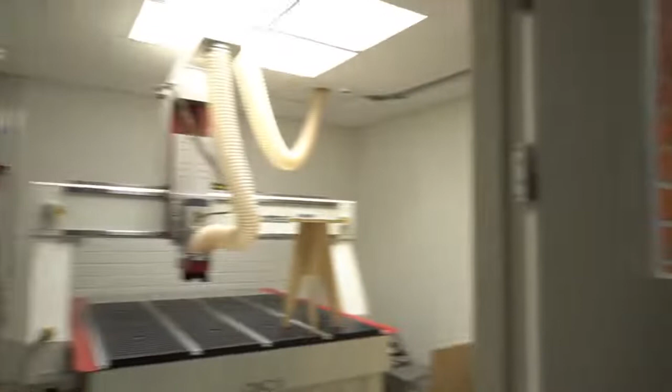It's one of the most dangerous machines here at the Fab Lab, but we have a nice setup, so it's actually locked - a room is built around it in order to provide as less damage as possible. It's also soundproof.

It is basically a milling tool that is mounted on an XYZ axis, so it can rotate the tool around its axis, and then it can move it in 3 different directions, basically X, Y, and Z.

This machine also features a vacuum table. These vents over here are where the air flows, so it's being pulled in through these vents. There's a vacuum pump on the other side of the machine.

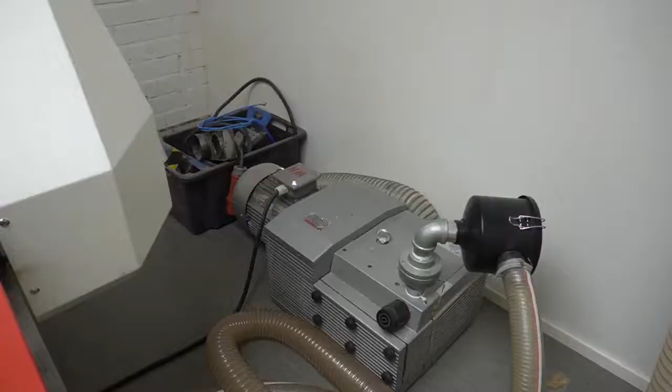For the vacuum activated surfaces, the machine actually has 2 sides, the left one and the right one, and those can be activated separately.

Over here to the left, that's the machine controller, which you use to control the machine. The machine controller is connected to the computer - this is just a screen and keyboard, the computer is actually on the other side, which then connects to the machine controller via a network, with an Ethernet cable.

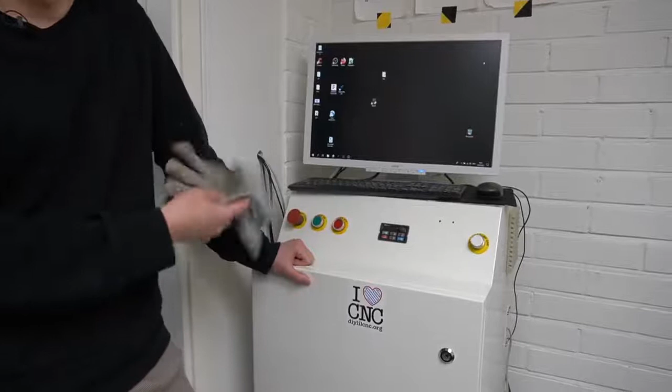On the computer, you load the G-code, and then this G-code, or the machine-specific commands, are sent over to the controller, which then drives all the motors of the machine.

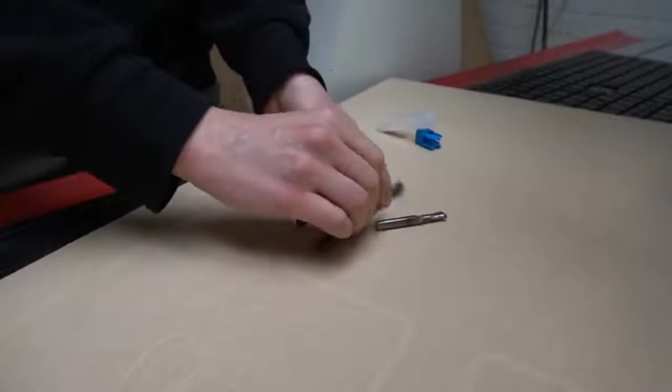So here we see several tools, and you should be able to tell the difference between those. Let's organize them from left to right. This is a drilling tool, a drilling tool for wood.

It can go only vertically, so you cannot use this for milling. If you know what you're doing and you need to drill only holes, then you can use this for drilling holes in wood.

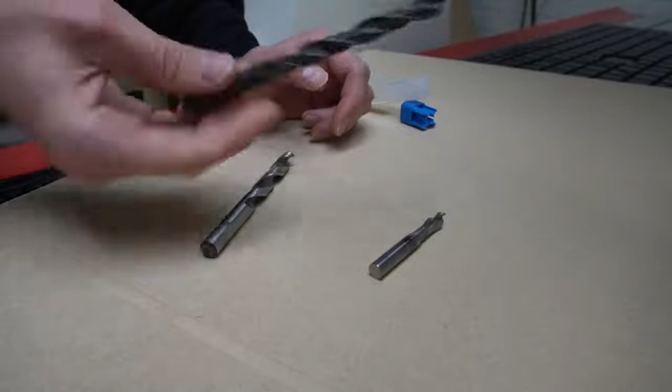This other one, with a pointy tip, is a metal drilling tool. It also can go only vertically, so it is made in a way that it is very good at pulling chips out and drilling holes. We don't drill metal here at the lab, because the chip extraction system is designed only to accept wooden chips.

So then you would use this only to drill vertically. What we are going to use though is milling tools.

This guy is, for example, a 2-flute flat end milling tool, and it is very good at going sideways. Milling tools are designed in a way that when they spin, they are very good at picking up material on the sides.

You can use this to do cuts and also engrave things on the surface of the material, but it's not very good at going downwards. If you're going downwards, it's usually better to do it in a circular motion, because it needs a little bit of space in order to be able to chip into the material. It's not very good at chipping the material vertically.

So forget about these drilling tools, let's focus on the milling tools. The next thing we need to know about is also our material. By the way, always, when handling material, especially wood, always make sure that you wear gloves.

We're going to use this leftover piece of wood, of plywood. This is a pine plywood, relatively soft. It also has a glue that is waterproof, so it's like outdoor plywood. Not a very high quality one, but just enough to get some interesting things done. If you post-process it properly, you can make nice things out of it.

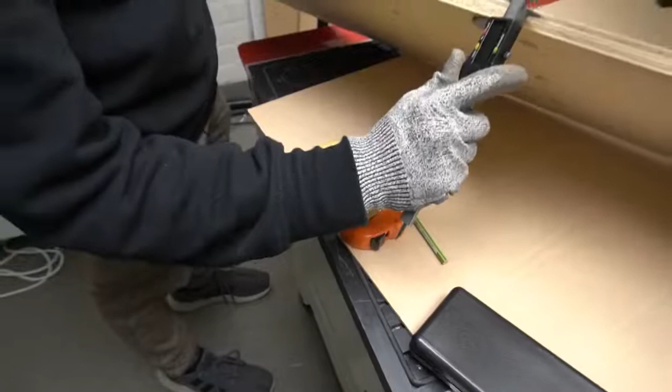So there's another thing about the material. Okay, we measured the X and Y dimensions, but we also need the Z dimension. We need to know the thickness of the material. So let's take a caliper and measure the thickness. Even though this is supposed to be an 18 millimeter plywood, it's showing a different value because it probably was shrinking.

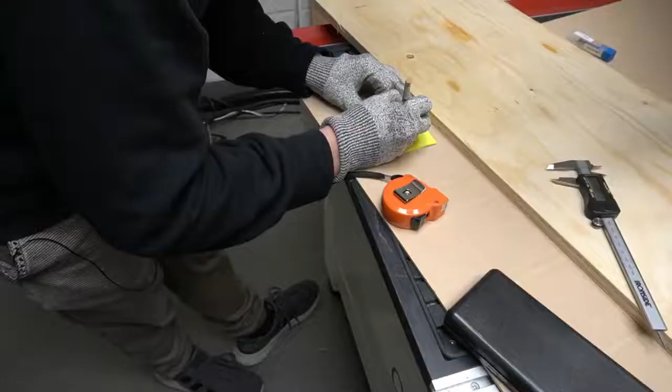All kinds of things happen with soft materials. They shrink, they're compressed, they bend and whatnot. So now we see that it's 17.64 millimeters. So let's write that down like this. So that's for the material. The other thing is that we should know some properties of the tool.

If you are interested in more tools, you can find them here. Here's a drawer with some tools. They are labeled with serial numbers. The first number that you see here tells you the diameter of the cutting part of the tool. And if you follow these numbers and look up on the wall, there's a table which gives you more information about the tool.

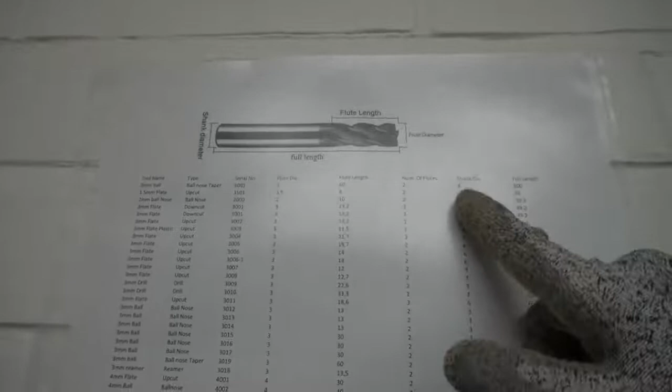For example the flute diameter and the flute length. It's sometimes necessary to set up tool instances in Fusion, for example. Then number of flutes, that's very important. Most of the tools that we have here have 2 flutes. Then shank diameter, that is important for mounting the tool. But let's continue with the tool measurement.

This one came in a box that says 8 millimeter 2 flutes flat. You can of course look up the table, but you could also use the caliper to measure its diameter, just to make sure. Sometimes things are not put in the right boxes. You see it shows 8 millimeter diameter for the cutter and also 8 millimeters for the shank. And then we can also check the flute length. It seems to be 30 millimeters if I'm looking from the right point.

Also, this tool has an interesting geometry. This is a so-called down cut tool. When it's cutting, it's going to press the chips down. So it's very good for cutting thin materials, and for plywood it is nice to use it to cut the top surface.

Usually, if you want the cut to be really nice, you would use this to cut the top surface, and then you would use an upcut tool to cut the rest of it, but maybe that's too much detail. So we're going to use this tool. Now we can write down some parameters for the tool. Basically what we need to know is the diameter and the number of flutes.

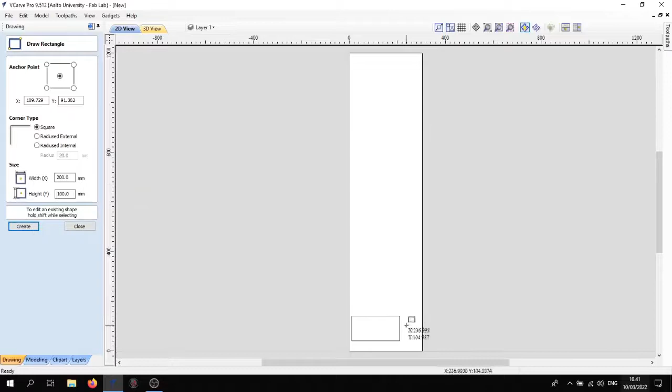But this time, just to test some things, we're just gonna make something really simple, also to explore the available tools over here. So let's start with creating a rectangle. For each tool that you open here, there's an additional menu. So we can specify really precisely where we want that rectangle to be, and specify its width and height. So let's say 200 millimeters and 100 millimeters, or let's make some kind of a shelf structure, something like this. Okay, and when you click create, it's going to create the rectangle.

It's closed. Let's try to position it as we like, somewhere here in the center. And let's create one more. So with the rectangle tool, you can actually also click and draw in order to create the rectangles. But if you want precise measurements, then you can use the rectangle menu over here. So for moving it around, let's select the transform mode, move, scale, rotate selection. Let's try to align it somehow.

And what I'm going to do, I'm going to create some features which are going to allow me to snap them together at an angle. So sort of a finger joint thing. If we do not remember what the size of it is, we can use tools like the measuring tool or this dimension tool. So we can select the point over here and then go over here, and then we can check the distance. So this is 200 millimeters.

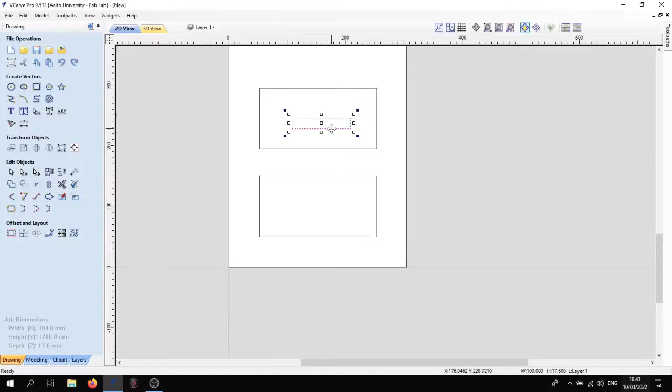And let's create a rectangle that is going to be 100 millimeters wide. And here we need the thickness of the material. So it was 17.6. That is going to work as our connector, or as the finger joint. And we can snap it somewhere. Let's do it like this.

I'm just wondering, is it possible also to align those? Yeah, so we can select this alignment tool. Oh, this is vertically. Oh yeah, so here you can align to material. Okay, there are quite a lot of nice options over here, but now we centered them in the material, and we also centered them between themselves. We could also center this one in the material like this. And we're gonna make a copy of this one. So edit, copy and paste.

And let's move this inside the other object. And let's align those together. So inside edge, we want to align it like this, and then we want to center it within the rectangle and also within the material. We can also double check whether these are aligned properly. Here, first need to select the bigger rectangle, and then, no. Yeah, now it's right. And we can close this.

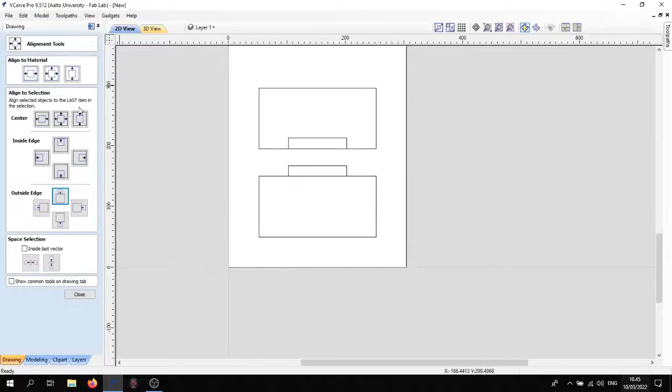And what we want to make sure of is that there are no lines overlapping. Because we will need to cut out the shape of the object, and if the cutter is going to go somewhere in the middle, then we're not going to achieve what we want. And for the other one, we want this part to be cut out from the rectangle. So what are we going to do? We're going to select these two and look up this weld option, weld them together. And then we're going to select those two and select the subtract option. So now, as you see, the idea is clear. I want to snap these together.

Of course, if you're using parametric software like Fusion, FreeCAD or whatever, then you can define all of those as parameters. You can define the thickness of the material as a parameter, and you can also define the tolerances in between as you read them from the process.

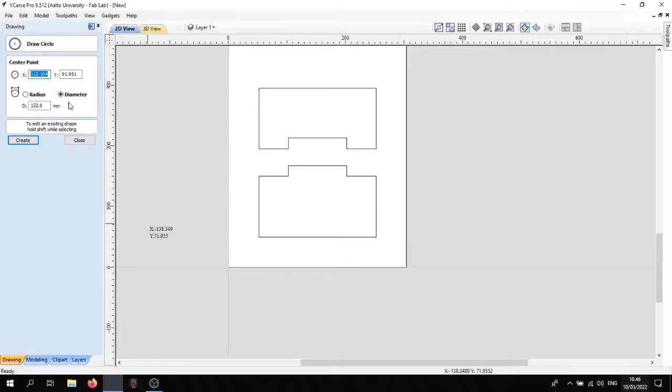Next, I'm gonna create a little circle that's gonna be a pocket for, let's say, a flower pot. Let's make this, and let's go with 70 millimeters. Small flower pot pocket.

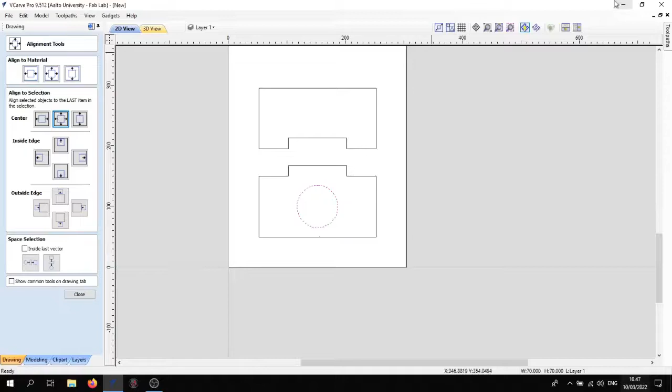And let's use the same alignment method. So we want to align it to selection and maybe move it a little bit down here. Okay, and now from here, we can go back to the main view like this and disable certain mode.

So we need to generate toolpaths so that the machine can understand how to move the tool in order to cut these out. And there are going to be certain things that we're going to bump into. So for example, for this inside cutout, there's going to be a problem that we're going to encounter. The problem is going to be the following.

So this is the tool when we look at it from the top. It has a certain diameter, in our case 8 millimeters. And if we use it to cut along the line, then what is going to happen in this corner is it's going to leave a little bit of material, and this is going to prevent the sharp corner of the other part from actually fitting in there.

So we need to make sure somehow that this corner is shaped in a way so that the tool can actually cut it out with enough room for the other part to enter. And V-Carve is nice for that because it has special tools that we can use to fix it. The main tool that you use for this is the Fillet tool.

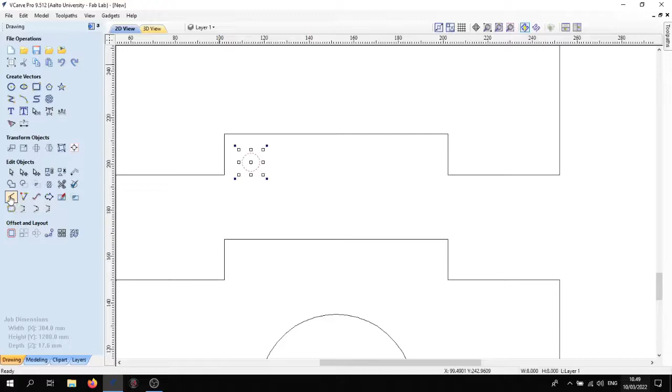And for that, we need to enter the tool radius. We're going to use an 8 millimeter tool, so we could specify the tool radius as 4. But I'm adding 0.1 to the value, because sometimes if the values are very precise, the calculations do not finish nicely. The toolpath generator sometimes skips some areas if there are overlaps. So I'm just telling V-Carve that the tool might be a bit bigger.

We could do a normal fillet if we know that we don't need this extra space for the other part to enter there. You can also cancel it out, or we can use the so-called dog bone fillet, which is going to create the minimum cut necessary to make enough space. So now if I close this and draw a rectangle from here to here, you see that the corner of the rectangle is going to fit right in.

Or you can also choose to have a T-bone fillet. By clicking on the individual edges, on the top and the bottom, you can specify where the T element, where the cut is going to go. Sometimes this can be useful. Some people think it looks better than the dog bone fillet, and the plasma option is more for plasma cutters. So you can choose one of those. I'm going to go with a dog bone fillet in these corners over here.

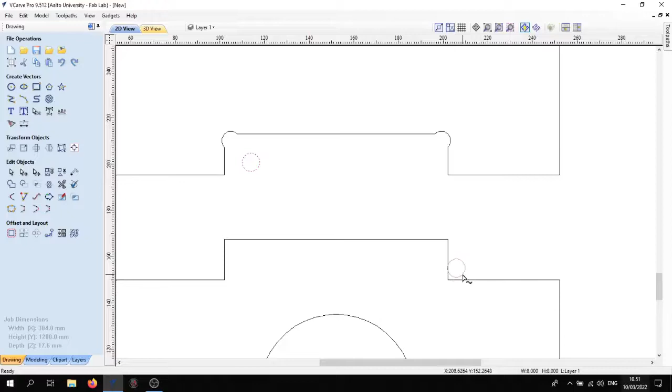And the same goes also for these corners over here. Again, if you move the profile of the tool around, you'll see that it's not going to cut into the corner really, and it's going to cause problems connecting these two pieces together. So let's go to the fillet tool again, and let's add dog bones also here.

And at this point, I think we are ready to go. I'm just going to delete these unnecessary elements over here. Let's save the file somewhere on the desktop. And for generating the toolpaths, you're going to use this menu. I like to disable the auto hiding here, and it offers you a variety of toolpath operations.

And it also shows you the material setup that we specified when creating the file. So if you forgot to add something, you can always go back here and redefine some values. Let's say you discover that the material you're using is actually 1 millimeter thinner or thicker, these kinds of things.

At first, you're probably not going to use more than the profile and the pocket toolpath, but you can also use the drilling toolpath if you understand the difference between milling tools and drills and you want to drill only. So we're going to start with the profile toolpath, which you can also call the cutting toolpath. So you click on that.

We're going to take advantage of that. And I don't want to max the machine too much, so this is why I'm choosing 16, but theoretically it can go up to 18. So let's choose 16,000 as the spindle speed. The feed rate, that's something that we're going to calculate in a second. So feed rate, this is the speed of the XY movement. And we should also stay in the range of the machine capabilities. So here we can go up to 20,000 millimeters per minute.

And then the plunge rate, it's the vertical movement. And as we know, vertical moves with the milling tools are tricky. So this is usually one quarter or 1/5 of the feed rate. But how do we calculate the feed rate?

So the tool that we're going to use comes from a certain manufacturer, and the manufacturers usually have tables like these, which are specifying the chip loads for certain diameters of their tools and for different materials. So in the same way as with the laser cutter, take these values as a starting point, and then actually do small tests in order to find out what is the best setting for you.

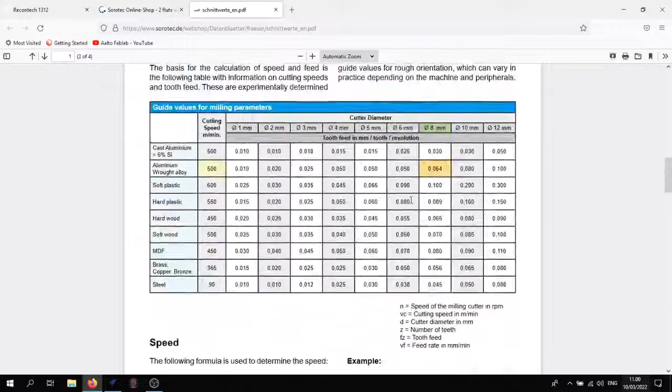So for the 8mm tool for soft wood, we can choose the chip load of 0.07 millimeters, and this specification is also taking into account the other practical tips that they have in this manual. So probably it's calculated for the depth of cut that is equal with the tool diameter. So it's a bit slower than normally. So we have another table, in this green book over here. But we can use this as a starting point.

And this is the amount in millimeters that each tooth of the tool is going to be cutting per revolution. And then in order for it to cut this certain amount of material, it needs to move forward. So it rotates and moves forward at the same time, and thus it should cut this amount of material. So let's take that into account in our calculation.

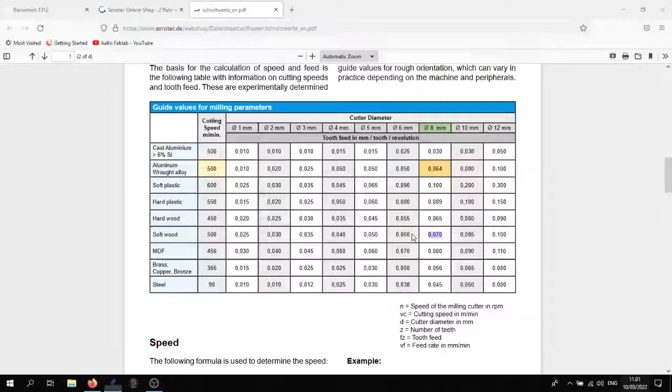Another thing that we'll need to know is the number of flutes. And remember from looking at the tool, we saw that there are 2 flutes. So let's use a calculator in order to calculate the feed rate. So the chip load for the tool is 0.07. Then the number of flutes is 2. And then we need to also know the spindle speed, which is going to be 16,000 revolutions per minute. And what we get is 2,240. Let's use this.

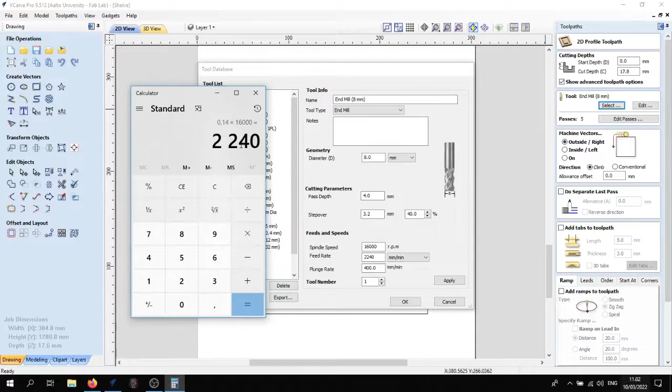You can also round it up, but let's test with these values and then see, maybe we can improve this. Yeah, for the plunge rate, we could just calculate 1/4 of it. So it's 560 millimeters per minute.

So basically, feed rate equals chip load times number of flutes times spindle speed. And in our case, chip load was 0.07, then times 2, then times 16,000, and what we got was 2,240 millimeters per minute.

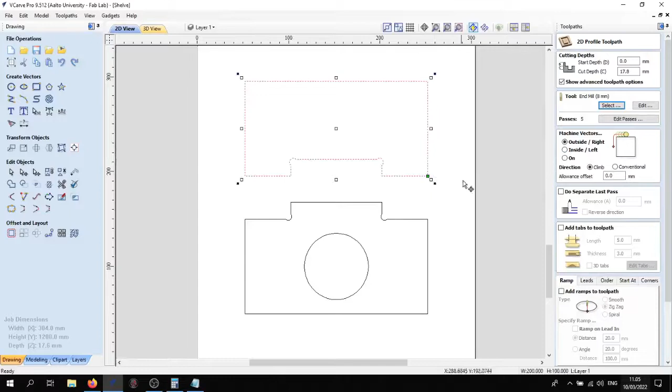So yeah, we calculated the feed rate and also extracted the plunge rate for it. So now we're all set. And we're going to start with half of the diameter pass depth, which is okay. Next we need to decide how we're going to cut, outside or inside. For that, we're going to select the shapes that we want to cut. And of course, these we want to cut from the outside.

Climb or conventional. The climb is going to leave a cleaner cut but put more pressure on the tool. Conventional is going to be more aggressive because it's going to cut against the direction of the movement of the tool, but it's going to cause less pressure on the tool. Climb is like climbing a wall.

When the tool is rotating, you should think about how the tool rotates, and then the cutting edge is going to climb the edge that it has to cut. So it's going to try to climb the edge that we are cutting out here. And the conventional is the opposite of that. And I'm going to skip the separate last pass.

What is very important is to add the tabs to the toolpath in order to prevent the finished parts from flying out of the material once they are fully cut. For that you can specify the size, so 5 millimeters, and it really depends on the material. The more dense the material, the smaller tabs you can leave, but the material that we're going to use is relatively soft, so we want to leave bigger tabs.

So 5 millimeters long and 3 millimeters thick. That's fine for now, and we can also edit them. We can generate a constant number of tabs, and V-Carve is going to calculate them for us, but they might not be in locations where we want them to be.

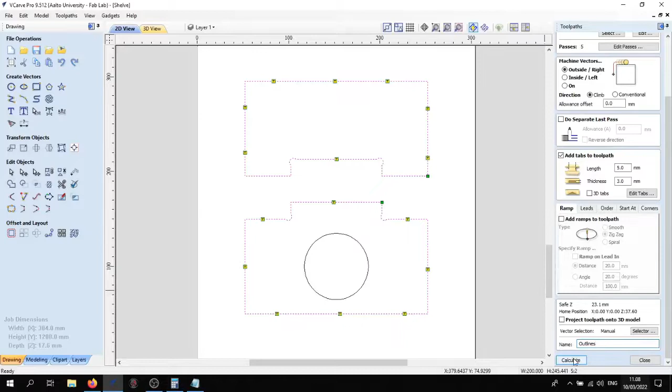And then here we can name the job. Let's give it a name: Outlines, and hit calculate. Now, this is a warning. You should pay attention to warnings and read the text, obviously. What it is telling us is the current tool cutting depth is exceeding the material thickness, which it is.

Remember, we set the maximum tool depth for the toolpath generator to be 0.2 millimeters more than the thickness of the material. In this case, we know what we are doing. We're going to use a sacrificial layer, and it's fine to cut into this sacrificial layer a little bit just to make sure that we cut through.

Yeah, it's just warning you that if you're cutting on the machine bed, then it's probably going to cut into it, and we don't want to damage the machine bed, because then you're going to damage also the vacuum capabilities of it. So you don't want to do that. But we're going to use a sacrificial layer, so it's fine. So we hit OK, and here V-Carve is going to give us a nice preview.

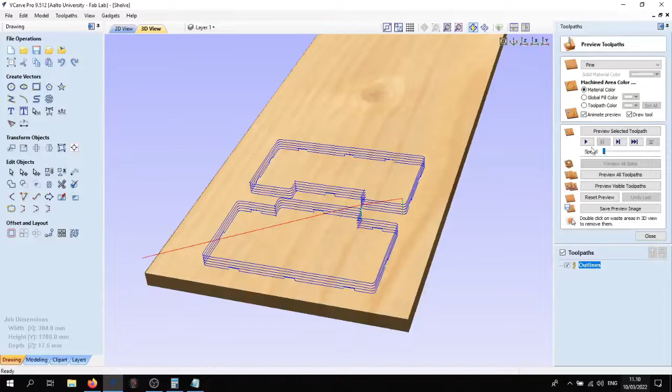These blue lines are the actual toolpaths. The center line of the tool is going to move along these paths, and we can preview how the tool is going to cut those. As you see, even with the slowest speed, it's doing it quite fast.

And you can also see what the tabs are. These are the tabs which are left on the last pass of the tool, so that the parts do not jump out from the piece of material and do not damage the machine, and most importantly, do not harm people.

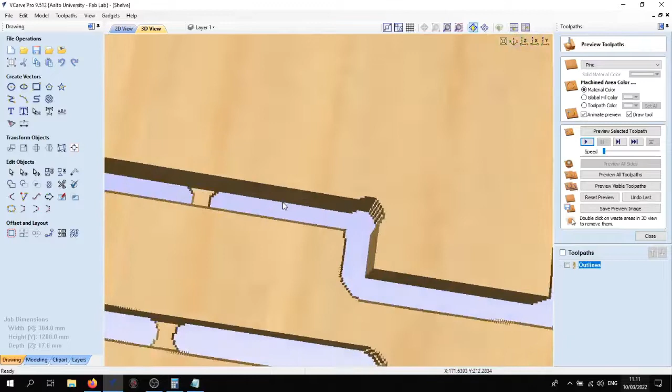And here you can also see that the dog bones are nicely cut and calculated. You can also reset the preview. Let's close this and go back to the 2D view, because there's one more thing that we need to do. We need to explore the pocket toolpath.

So let's select that. Here, instead of specifying the depth of cut, since we don't want to cut through, we rather want to have a certain depth of the pocket. Let's say that the pocket is going to be 5 millimeters deep, or maybe 7. We're going to use the same tool. Just double check whether you have the right settings set there.

End mill. Here the step over is important, so 40% of the tool diameter is usually fine.

Then here you can specify the way the pocket is cleared. We can offset it, showing a preview icon that starts from the center and goes in a spiraling way, or it can do a zigzag motion and clear the final edge at the end.

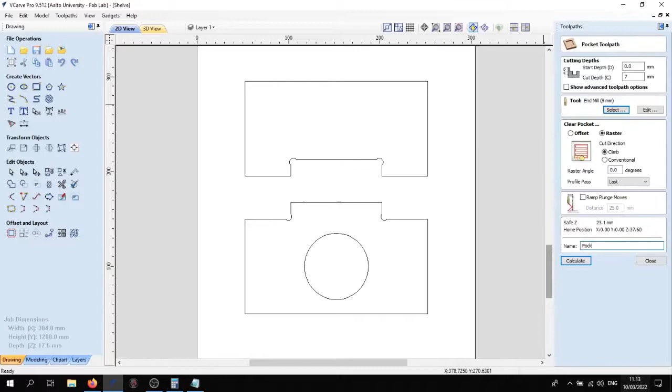Then ramp, I'm going to leave this out for now. I'm going to name this operation pocket. I haven't selected any vectors, so this is going to be the vector. And calculate. And zoom in over here.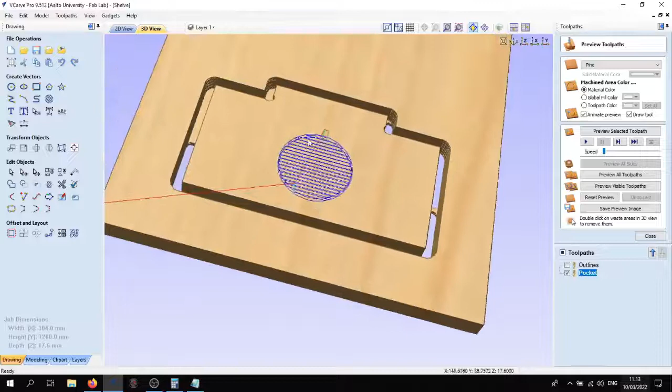You see it has two levels of these toolpaths, and if we play them back, you see how it's going to work. This is pretty much what we expect from the machine.

Now we are ready to export the toolpaths. We hit close here, select these two, and then save toolpath. If you're using the same tool, you can output all visible toolpaths to one file. If you're using separate tools, you would rather separate them in separate files.

Here you should choose the Mach 2/3 arcs millimeter file. Grbl you can use if you're building your own Arduino-based CNC machine. And we hit Save Toolpath.

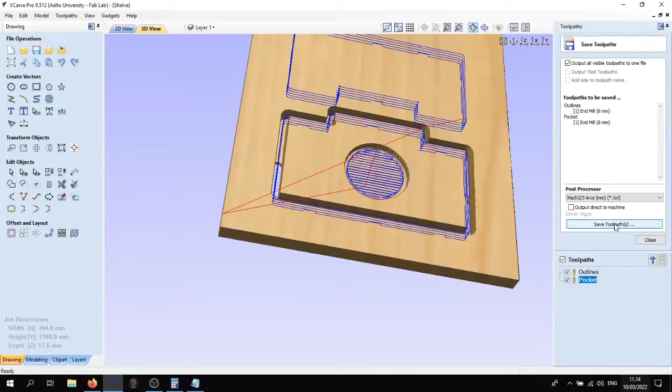If it's a small job, the name doesn't matter. But if you're doing a bigger job, you know what kind of job it is, so you could add. Let's say you're using an 8mm tool, you can also use shortcuts as T, 8mm, and then for thickness of the material or depth of cut, you could specify the thickness of the material.

17.6, or material. This is going to hint you, especially if you're using multiple tools, then you want to maybe have the tool sizes added here. It doesn't add it automatically like CopperCam, for example.

I want to use the vacuum table capabilities, and this is why I am going to open a few vents. And you should kind of also take a look at the material.

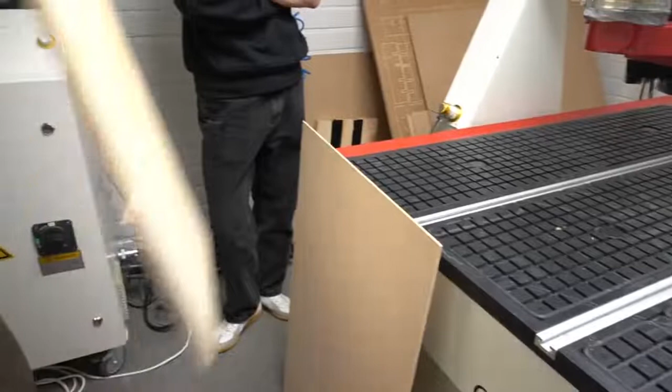So now, because of the material size, I can see that the vacuum area that could be used to hold the material down could be one of these chambers. We're going to use the left chamber and then the left side of the left chamber, so half of its potential. Let's open these two vents over here.

So this one and that one. And the caps of these go into the yellow box just next to the machine, so just put them here. In case you need to close the vacuum vents, you can find these caps over there.

And I'm going to close this the cap. And I'm going to put this here.

The quality of the sacrificial layer matters also. The better the surface, the easier it is for the vacuum to pull the air through. So you might wonder why I'm putting some kind of material on top of the vacuum system, and whether it's not going to just block it. But MDF is actually relatively porous, and the air is actually flowing through it. When we put something on it, it's going to actually hold it down because the air is going to flow through it.

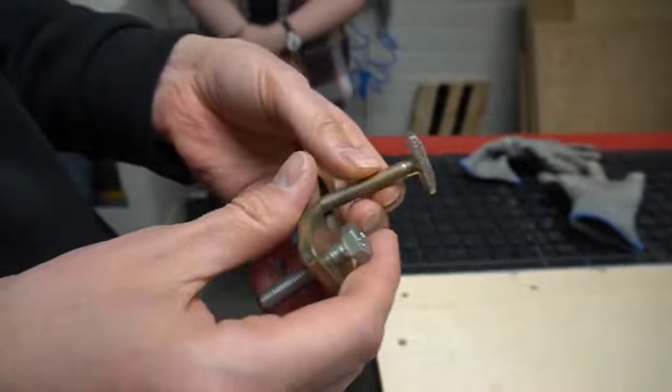That is, with a special head that is meant for these T-slots over here. So the CNC has also these aluminum rails where you can insert this in like so, and it's not going to lift off. It's going to create a counter pressure for these fixtures over here, so you can actually clamp your material down also like this.

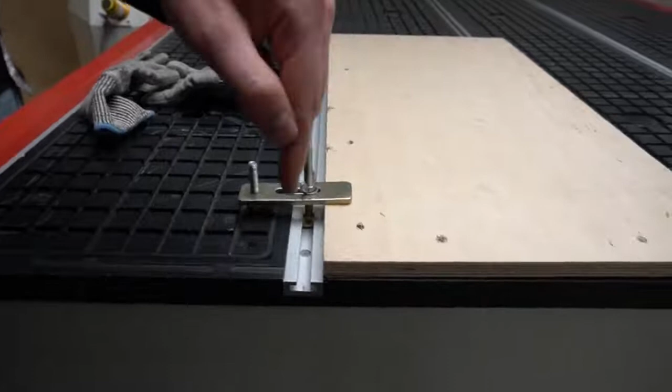But I wouldn't recommend you doing this unless you really know what you are doing, because this involves calculating your tool paths, taking into account the fixtures. The traveling height of the tool should always be above any of the parts that the fixtures contain, so that when your job starts running, the tool doesn't accidentally crash into the fixture.

Or while cutting, it shouldn't also crash into the fixture itself. So with these you should be very careful, and really make sure that you understand the toolpath generation well enough in order to be able to use it.

For bigger sheets, you might have a little trouble because it's kind of bending. Let me bring another sheet of plywood. For the spoil board, you would not use this kind of wood - you'd use MDF because the air flows through it. But just for demonstration purposes, I'm going to use this for now.

Sometimes you might have trouble with the vacuum table, the plywood is bending, and the clamps do not fit where they should. So you could also use some wood screws to fixture your object. The bottom layer, the MDF, attaches to the vacuum bed quite nicely, but the problem is the top material. To fixture properly, you could use wood screws and attach them like so. Just make sure you do this carefully so that after the job is finished, you can also remove the wood screws.

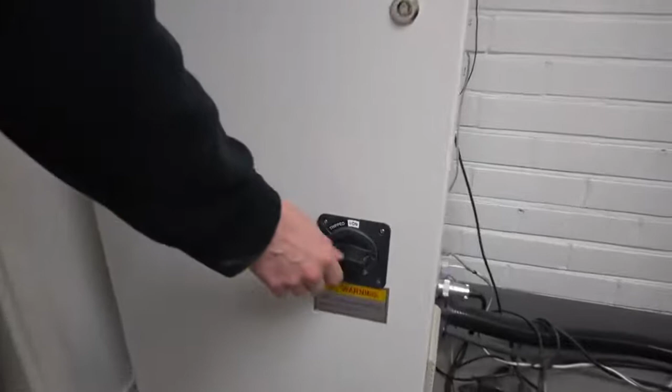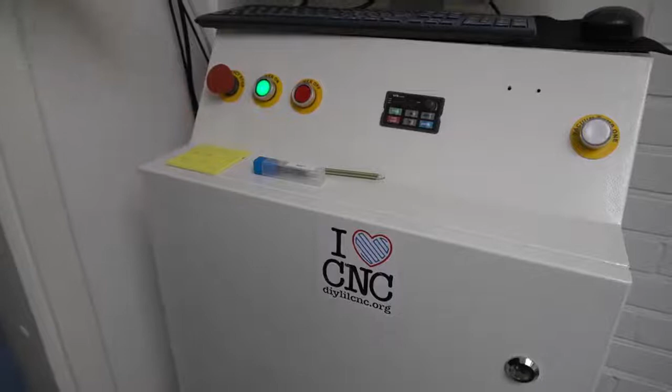To turn on the machine, we need to use this switch over here to enable the power supply. Then the next thing is to press this green button over here. Then you should wait for 15 seconds or so. On the desktop you should locate the Mach3 icon and hit OK here. And it's going to open you this interface.

There are 3 things that you should first do before setting up the machine. One is you should reset it, so you hit reset. Then you should always check whether the soft limits toggle is on, so it should have a green line around it. And the third is you need to click this button to reference all the home positions for all of the axes. At this moment, just make sure that you are at a safe distance from the machine, because it's going to start to move.

At this point you should be able to move the machine around using these arrow keys on the keyboard. You can use the keys on the laptop computer and also on the connected keyboard over here. Just make sure that whoever is walking around the computer outside the room does not touch the keyboard while you're working with the machine.

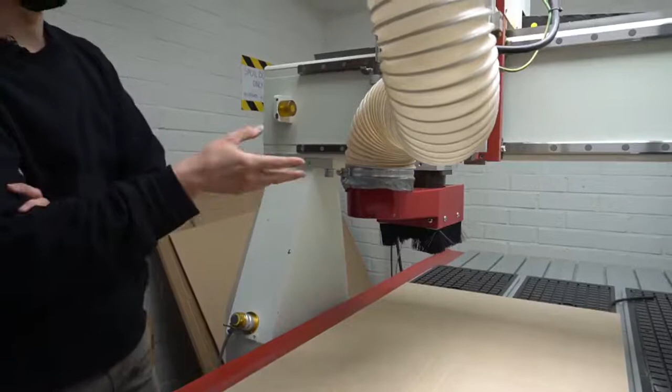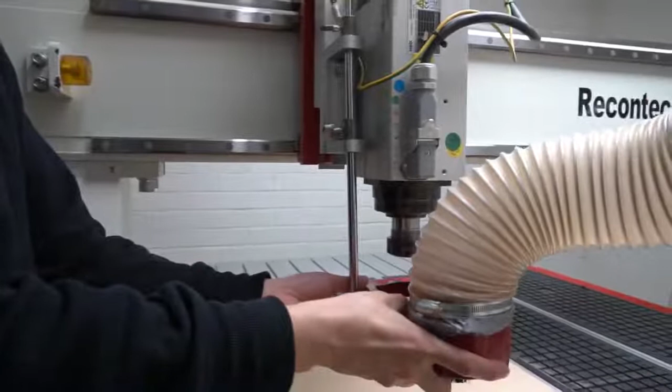Now you can see that the dust shoe, or the chip extractor, is actually mounted, so we need to remove it somehow. There are these two attachments over here. While holding the dust shoe with one of your hands, just open these so that you can slide it. Always try to keep control with your hands - don't drop it, because otherwise this rod is going to just flip outside and fly away. You're going to fold it around like this, and then up, and then you can fasten these set screws again so it holds in place.

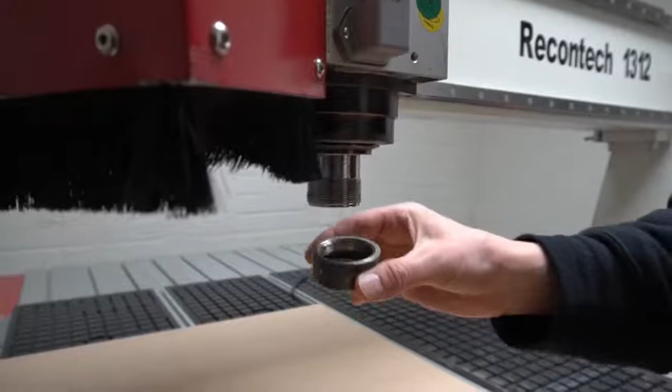Now we have access to the actual tool holder. The tool holder has a threaded mechanism, so it has a nut that you can remove, and this nut has a geometry that allows it to hold a thing that we call a collet. We have several collets, and they're going to allow us to actually fixture the tool, to hold the tool properly.

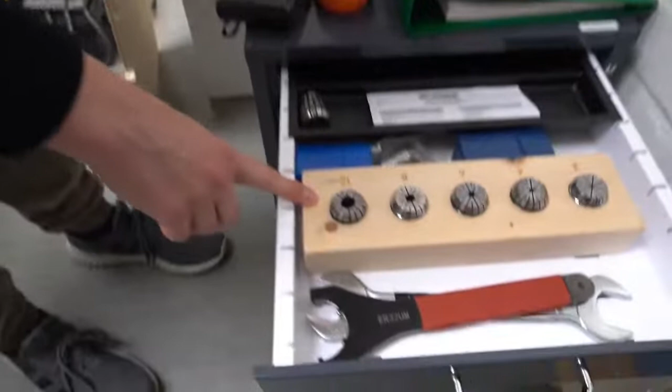Now if you look at the little drawer, the little locker on the top shelf, you're going to find the collets. Let's flip them around. From left to right they're numbered, and these numbers mean the diameters of the shafts they can support. Since we're going to use an 8mm tool with an 8mm shaft, we're going to choose this one.

Together with the collets you're going to find also the tools in order to set up the collet together with the tools. So let's take those.

Another useful thing is this soft surface. It's nice to put it under the tool holder, because if you're doing it the first time, most likely the tool is going to fall down, and to prevent it from getting damaged too much, it's better that it falls on a soft surface. So now let's take the tool out and put it here.

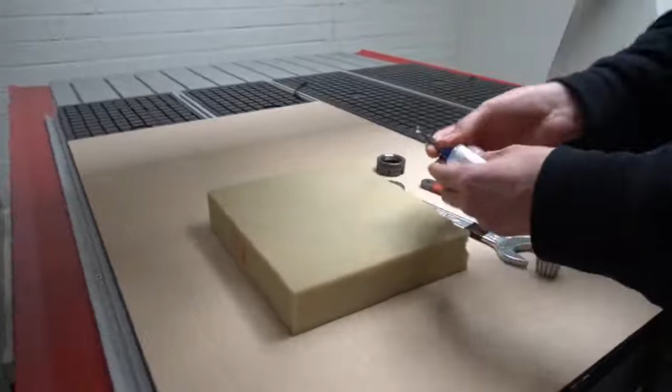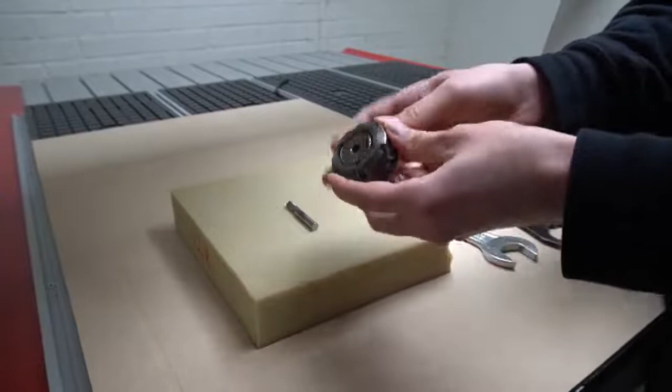Very important is the insertion of the collet into this nut. First you put it in, but you need to apply a little force until you hear a click. As a result, you should always check whether the surface of the collet is aligning with the bottom surface of the nut — these should be parallel.

When you have achieved that, then you can screw it onto the tool holder. Do it just enough so that you feel that counter pressure.

At this point you're ready to insert the tool. I usually put it 1 to 1.5 centimeters deep inside the collet. Now the collet is keeping it quite nicely, so I don't need extra movements or anything. Then I would use these keys.

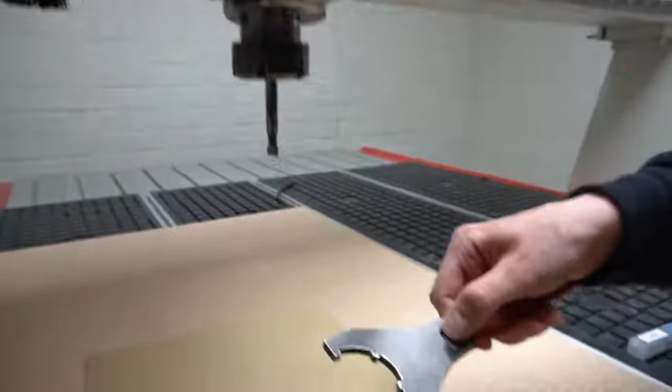This is a bigger key, about 32 millimeter diameter, to hold the top part of the tool holder. This ER32 is the standard for the collets. I'm going to first insert it under the nut, then slide it upwards so it matches with the pockets, the grooves of the nut.

Now I can do the adjustment. You shouldn't put too much pressure — imagine as you would be squeezing a lemon. Also take into account that during operation the parts are going to heat up and expand, and after that it's going to be harder to remove them.

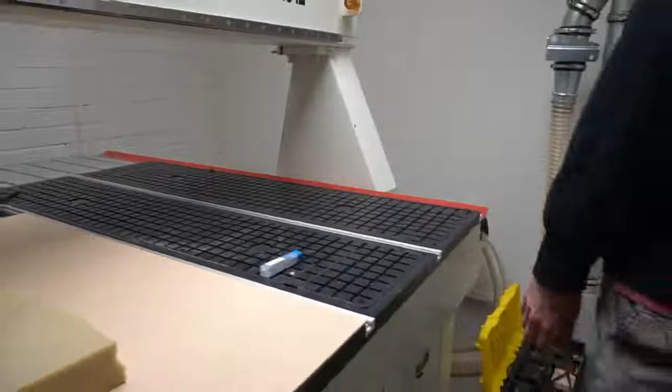I'm going to put the tools back here and remove any unnecessary objects from the machine.

Next thing is going to be to set the Z origin by using this tool. Here on the side of the machine you can see this Z origin sensor. You can take that and put it on a location on the sacrificial layer. The trick is that the Mach3 software knows the height of this.

The operation is going to be that we move the tool down — or there's going to be an automatic operation that moves the tool down — and as soon as it touches the surface, it's probably some sort of capacitive touch or just a contact. So the machine detects the current Z location, subtracts the height of the sensor from it, and sets that as the Z0 position.

In order to do that, we also need to activate the vacuum pump, because the material is going to be pulled towards the table, and it's going to lose — it's going to be approximately 1 millimeter lower.

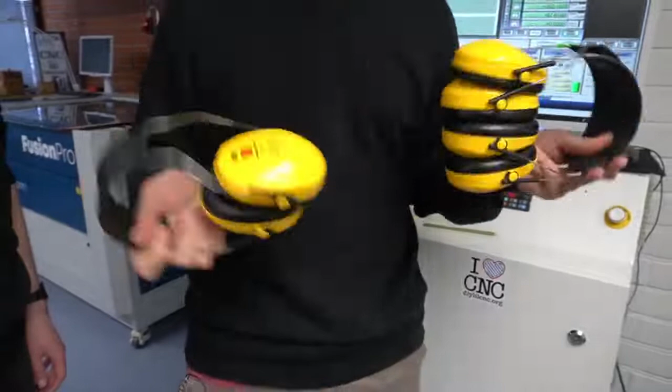Also remember that you should use these ear protection headphones, because the vacuum pump is going to be really loud. When you're operating the machine alone or with a friend — you should never do it alone. There should always be somebody around when operating the CNC machine.

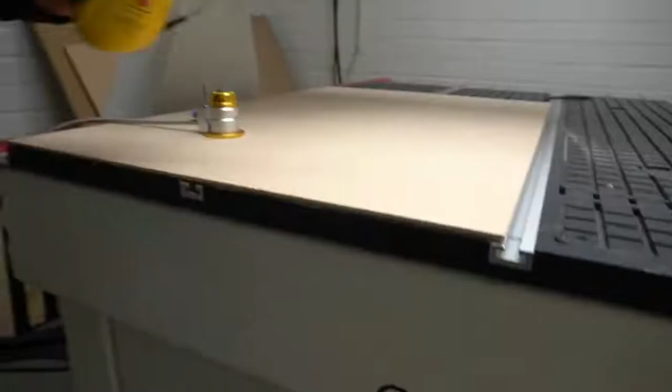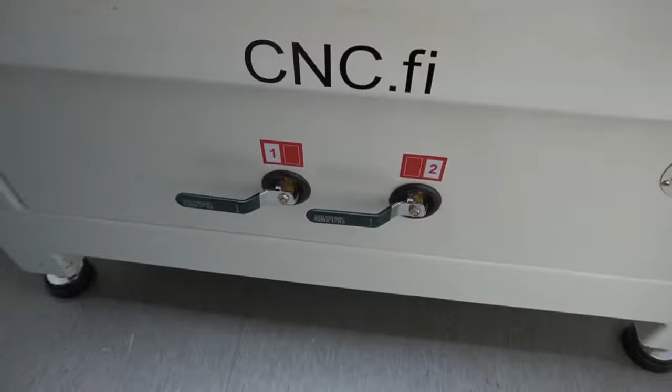Before activating the vacuum pump, you should also make sure of how these valves are arranged. If they are at this position, both of them are closed. Once you turn them in the direction labeled O, that means they're open. Since we're going to use only the left part, we're going to open only the left chamber.

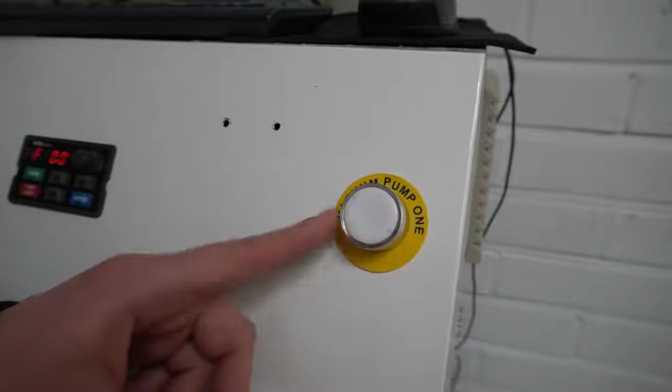In order to activate the vacuum pump, you use this toggle button on the controller. If you press it, it turns the vacuum pump on, and if you press it again, it turns it off. Let's turn it on. As you see, it actually lost a millimeter.

Now I'm going to move the machine above the sensor.

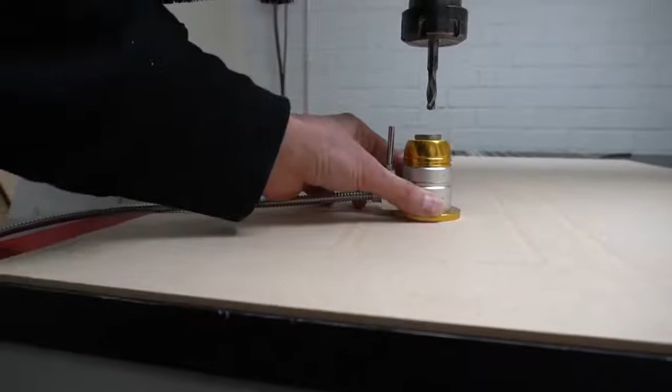And then, of course, we can move the tool a little bit away so we have a little bit more room to set up the material. You can use a little bit of compressed air to get rid of dust from the surface. We don't want to have anything in between the sacrificial layer and the material. So again, when handling the material, it's a good idea to wear gloves. So I'm going to pick up the material from here.

So you see it's a bit bent, but I think not too much. I hope that the vacuum table is actually going to solve the issue. So let's activate the vacuum pump once again. So now I'm going to activate the pump, and the table should pull the material towards it. This is fine. Let's set the X and Y.

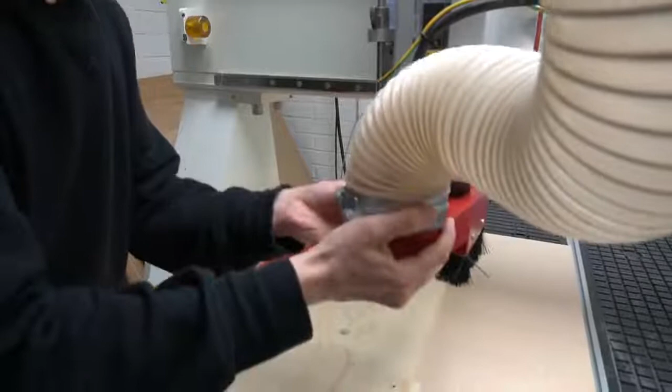Okay, and now, just before we start to cut, I'm going to remove the gloves again. I'm going to move this closer so we can access it. And I'm going to put the dust shoe in place again. So I'm going to open these set screws slowly and carefully and move it here. Set the set screws. The concept of this is, you see this red dust shoe edge, it's a bit above the bottom face of the collet. So you shouldn't be worried. If you have been calculating your depth of cut according to the amount of tool that is out from the collet, then this shouldn't be a problem.

And now once this is done, we can actually exit the room and activate the vacuum pump and start the job. So I'm going to activate the vacuum pump. So as you see, the room is quite nicely built so that not much sound is getting through this door and the walls. So this is why it is important that two people are around when operating the CNC machine, because if one of you is inside and something bad happens, nobody's gonna hear you. So two people always around when operating the CNC machine.

We need to load the G-code that we just generated with V-Carve. So in order to do that, you go to the Load G-code option, navigate to where your file is. Different post-processors or toolpath generators are going to create different files, but essentially they are internally the same. Sometimes Fusion generates these tap files. So if you cannot find them for some reason, just remember that you can check the file type over here.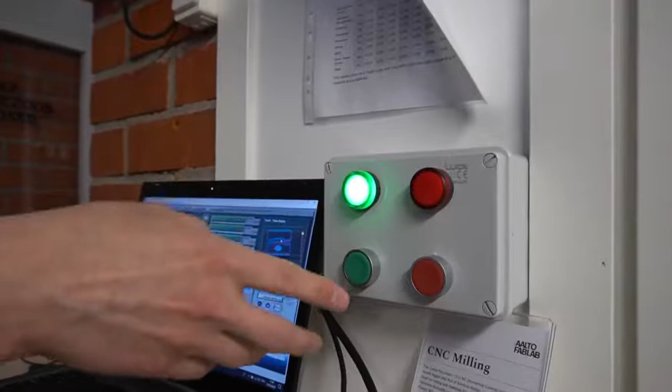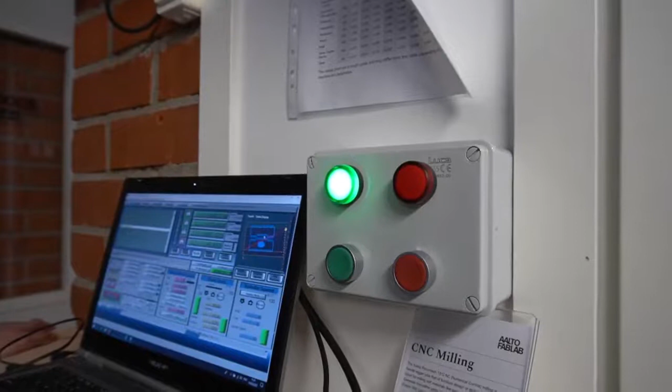The red button is also linked to the door mechanism, so whenever you open the door, the job is going to stop, the spindle is going to stop. But still, the spindle has an inertia, so it's going to take some time, 10 seconds, for it to completely stop spinning. Okay, so let's start the job. And let's see what's going on there.

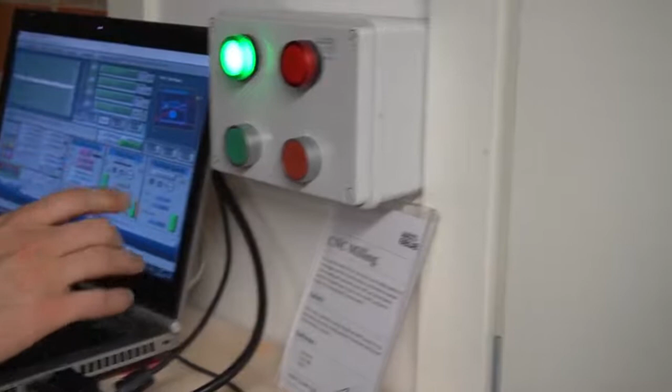Okay. So now, as you see, the light is green again, which means that the spindle just stopped. Also you should wait until it visually stops spinning. And then, just to make double sure that you are not endangered while collecting your parts, you can always use the keyboard and move the tool away a little bit, so it's not in your way when you're trying to remove the material.

Now, before entering the room, the vacuum pump is going to be on and it's going to be really loud, so it's a good idea to use the headphones. In order to switch off the vacuum pump, you press this button again. Remember to use gloves when handling the material. And as you see, the tabs that we put in place allow us to remove the whole workpiece and then just put it aside for post-processing. So I'm just going to put it here.

Before you leave the room and before you leave the machine for others to use, make sure that you remove the tool. In order to remove the tool, I'm going to remove the gloves also. It's dangerous to operate the spindle with gloves because they can be pulled into the mechanism in case it starts spinning, so you don't want that. I'm going to move it now a bit closer so it's easier to remove. I'm going to start with the dust shoe. Be careful not to hit the tool with it.

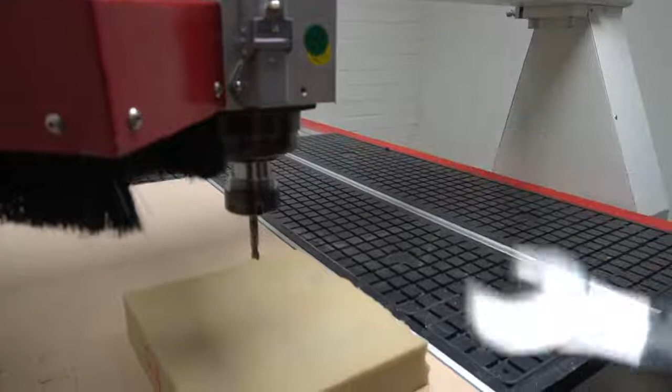And let's use this soft pad over here. Let's get the keys out. And here's a nice trick that I would like to talk about: how to safely open up the connection, how to loosen the nut. Try to keep these two keys as close as possible, so you can grab the handles with one hand. In case you're using two hands, this prevents them clashing together. The first unfastening turn can be done like this, and then from there you can actually use your hands.

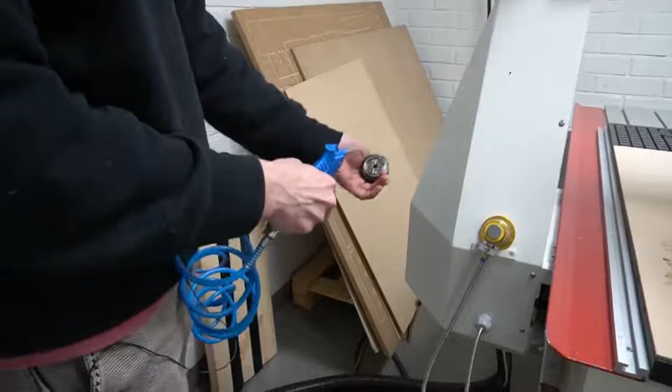Take the tool out. And before you take it out, you can see that there's dust inside. So what I like to do is use this compressed air gun to blow in it a little bit, to clear out the dust before I do the removing motion. The removing motion looks like this: you hold it bottom up, and then you press with your thumb.

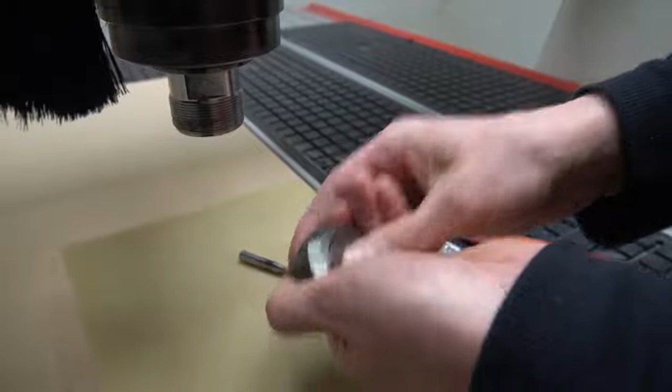Be careful not to put your nails somewhere in between. I have seen people doing this, and then it goes forward and they break their nails. So try to do it with the middle of the thumb, somehow like this. And then push it in and put the collet in place, over here, along with the keys.

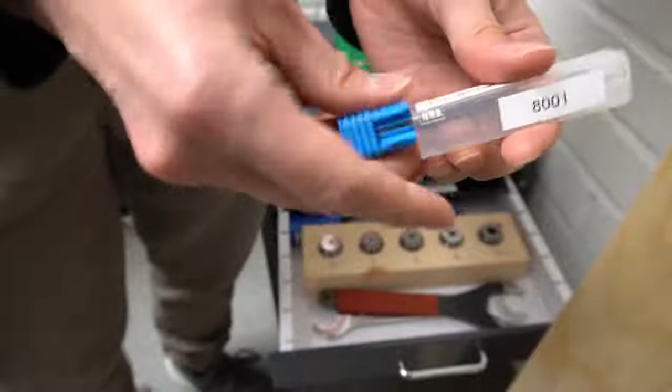And don't forget to put the tool back in its box, like so. Close it and put it back where it belongs. This was an 8mm tool, so put it in the 8mm pocket over there. And mount the collet nut back up like this. And if you have a lot of dust around, then it's a good idea to use a vacuum cleaner to clean this up. So I'm going to move this away.

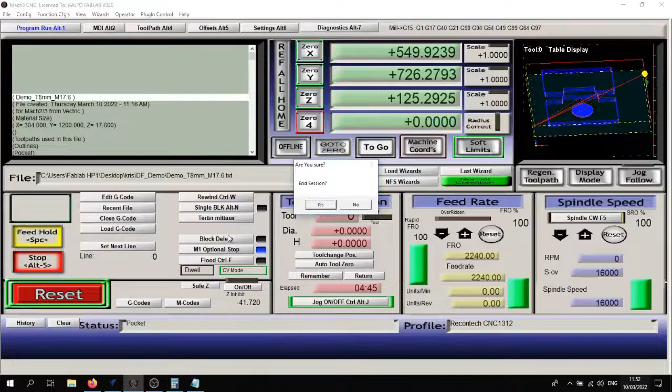So this is the place where you can find all kinds of sacrificial layers, and just remember not to put your projects here. This part is for sacrificial layers only. And lastly, we should turn off the machine. Start with closing down the software. Then press the red button on the machine controller. Wait for a few seconds until this goes up and down and you hear a click like this. And after that, you use the main switch and rotate it to the off position.

Okay, let's take our finished milling job, go to the wood room, and do some post-processing. This is the job from the other side, so you can clearly see the tabs over here. There are several ways how you can cut the parts out. One is using the chisels that you can see over here.

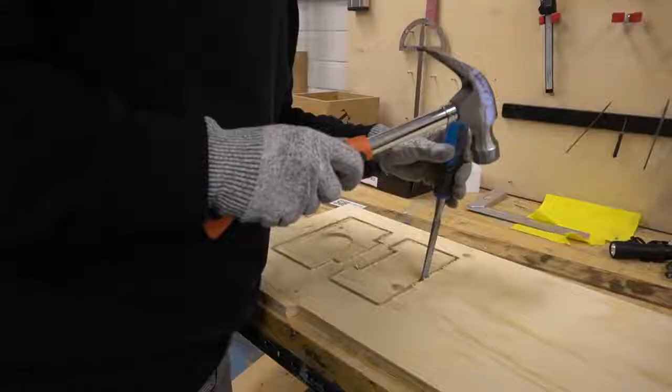And okay, here's the second one. You can put these on a clean surface. Let's put these in the leftovers part over here. So here in the blue cabinet, in the bottom shelf, you can find a tool.

So this one is basically a router, like a hand router, but we are using it for one specific purpose, to remove tabs. This special tool has a bearing at its end, and the diameter of the bearing is the same as the diameter of the tool that we are using. It works like this.

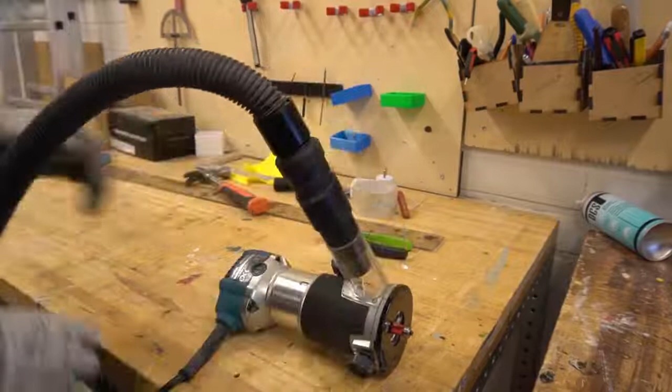We usually use it in combination with this vacuum cleaner over here. You see, at the end of the tool it has this connection over here. So we connect the vacuum cleaner here so that it can remove the chips that are being cut off by the tool. And as for the power connection, you can use the power connection on this specific vacuum cleaner over here. So it's going to turn on as soon as you turn on the machine. So let's do that.

Like this. And we also have to plug in the vacuum cleaner itself. Now we're going to turn on the machine. It's not turning. Here is the on-off switch. So both of these switches should be on, on the vacuum cleaner. And then when you turn on this, both of them turn on.

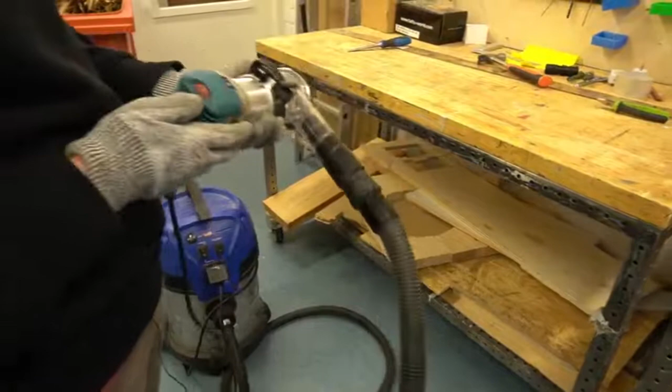And then here on this machine you can set the speed. The maximum is 6, and minimum is 1. So we're going to set it somewhere in the middle, like 3. The way it works is that you use it from the bottom side of the workpieces that we cut, so that the tabs are on the top. We place it on the edge, the bearing rests on the edge of the actual material, and the tool cuts the remainders, the remaining tabs. Before we do that, it's a good idea to clamp these.

There's a special way to hold the tool. There's this rubber handle, so you should keep one of your hands around it, and the other hand on the top part of the tool, where the on and off button is, so you control the on and off state with the other hand. Before you turn it on, you put it on the surface, and the little lid over here shows you where the tool is actually going. And you want the tool to be perfectly perpendicular to the surface of the workpiece.

So what it did, it cleared off these tabs exactly at the level where the edge is. So it's a very good tool to clean off these edges. And of course, as always, after using the tools, put them back as soon as possible, so that other people can find them.

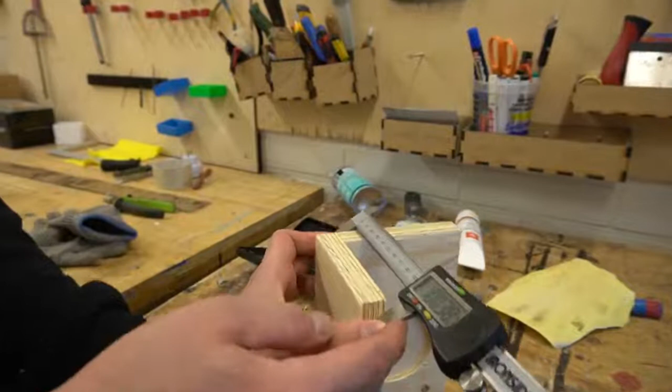Basically, we have a little shelf for a flower pot now. One more thing left to do is to check whether the dimensions we got from cutting it out are actually the same as we were expecting. So let me bring the measurement tools. Let's first measure this dimension over here. The expected length was 100 millimeters, and we are getting 100.3, which means we actually cut a little bit less than expected.

Meaning that the tool was not occupying the full 8 millimeters as we were calculating. The reason might be that we were using climb instead of conventional milling, so one could compare the difference between climb and conventional milling. Another reason could be that the wood is kind of soft, and while cutting, some parts were expanding and shrinking. But overall it looks like fine precision.

I think that's it for the introduction of the Recontech 1312 milling machine. And I hope to see you milling.